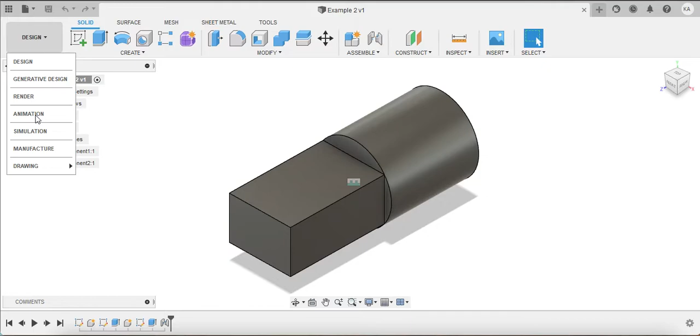So if I want to create an exploded view, this is going to be in a different workspace called animation. Go ahead and change that big button to say animation. And here there is a timeline. So we want to transform this by moving some things around.

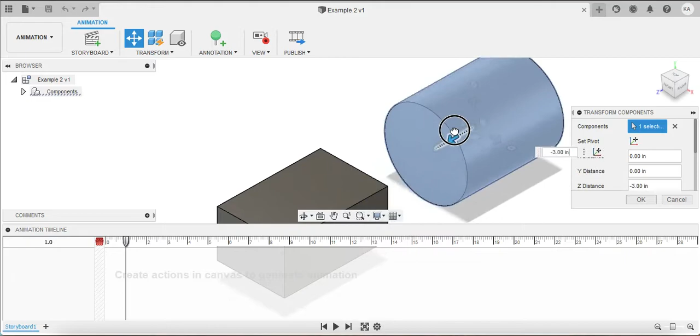We could try the auto explode, but I haven't had any good luck with that. So instead I'm just going to click on the arrows there, select one of my components, and use the arrows to separate these 2 things out. Press OK. You could certainly separate as many pieces as you need, and here you can see the separation that's happened.

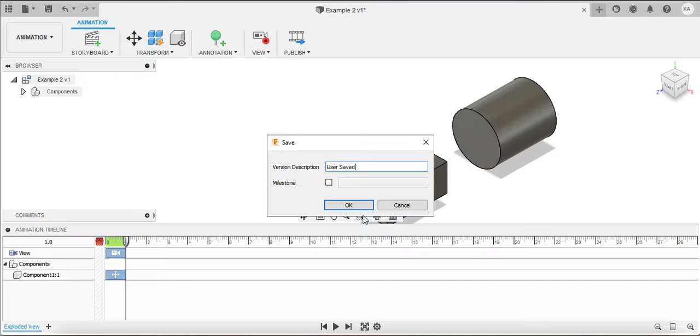Down in the lower left, this is called Storyboard 1. I'm going to right-click on that and rename this to say Exploded View. That way when I go to look for this specific item in my drawing file, I will be able to find it. So I'm going to go ahead and hit Save, click OK. It is saved as part of this design file. It is still in this design workspace, just in an animation space. And there it is, the exploded view.

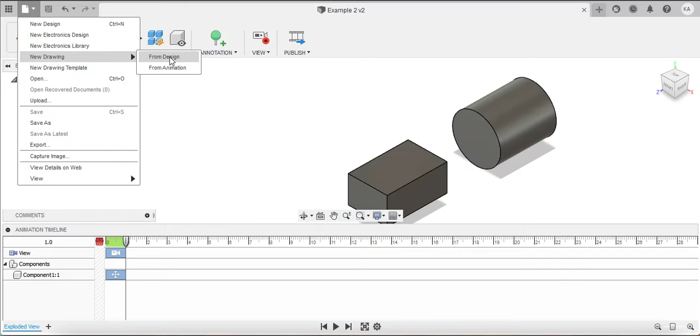So if we want to take our design and create a drawing, I'm going to click New Drawing from Design. That is definitely what I want, the full assembly contents. But I do want to change this sheet size to say 11 by 8.5. Go ahead and click OK.

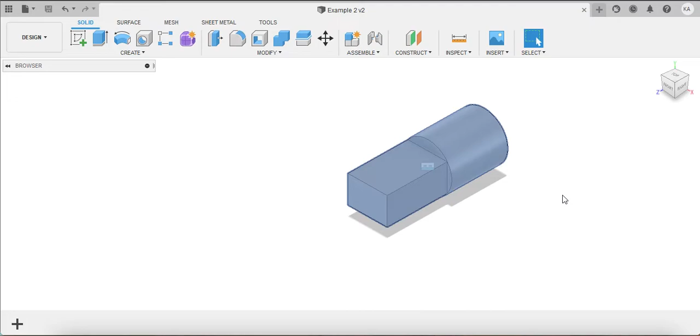And it takes a little bit to generate. It is still thinking. Yep, it takes a little bit of time, and that's okay. So by having selected the shape that I did, it is long ways. That's what I want to see.

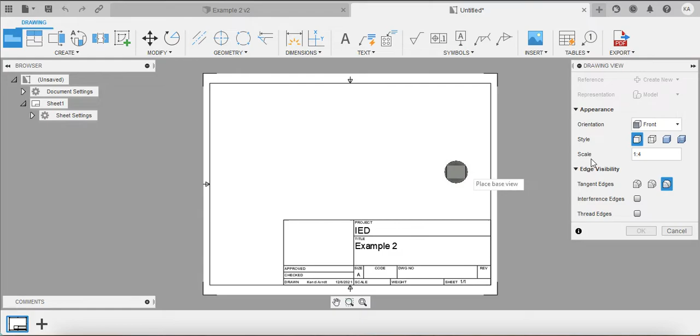And now right before I place the base view, I can change the appearance, I can change the orientation. So maybe this is what I would prefer my base view to look like. Go ahead and place that and click OK.

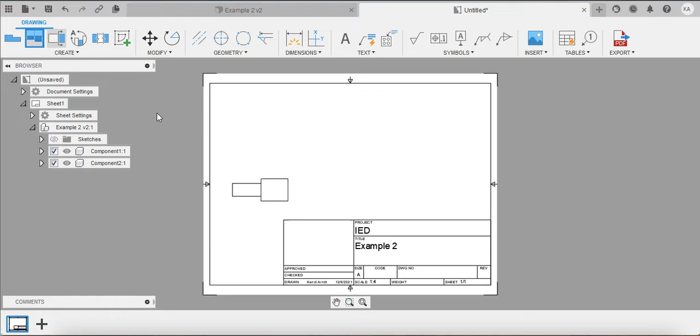And then if you want to have any projected views, which of course we do, let's go ahead and choose projected view. Click on that, drag it to the right or drag it up, whichever direction would be best. And be sure, of course, to have an isometric as well. Press enter when you're done doing that.

Definitely double click on the isometric and change the appearance style to shaded. That is definitely what we want.

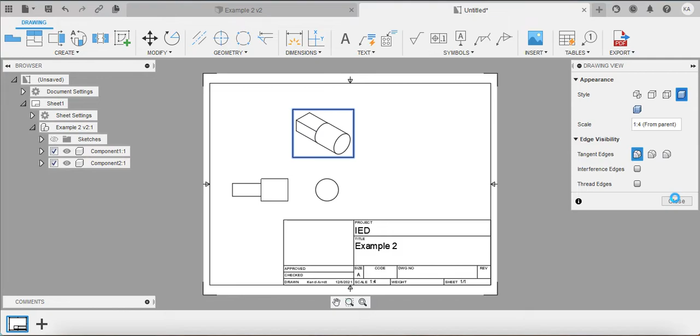And of course, as always, put in a couple of dimensions to indicate how these 2 things are related to each other, how far some things are away from each other. You don't need to put any individual part dimensions, don't worry about that. The last item we want to bring in is the exploded view.

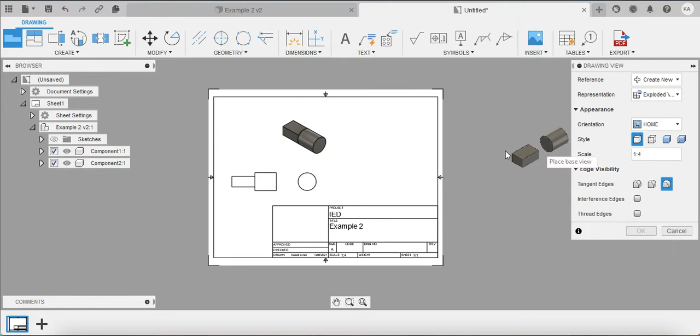So when we go up to place base view, this time instead of representation of model, we're going to select exploded view. That's coming in from our storyboard. And that scale is a little too big, so maybe change it to 1:4, and then we can see the exploded view there. Go ahead and click OK.

Leave that unshaded, that's perfectly fine. Unlike Onshape, there are no lines that connect this to show how the 2 are connected, but that's why it's on here with the isometric and the rest of the representations, so that we can see that.

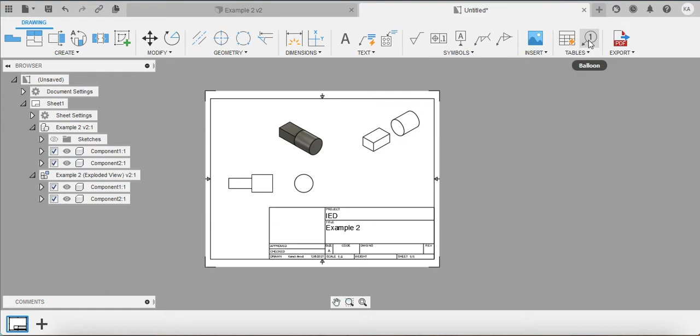Additionally, we want to include things like our balloons. So go ahead and select balloon. Make sure you drag those off at an angle, putting a balloon up for each individual item. And then go ahead and click table, and under type, click parts list.

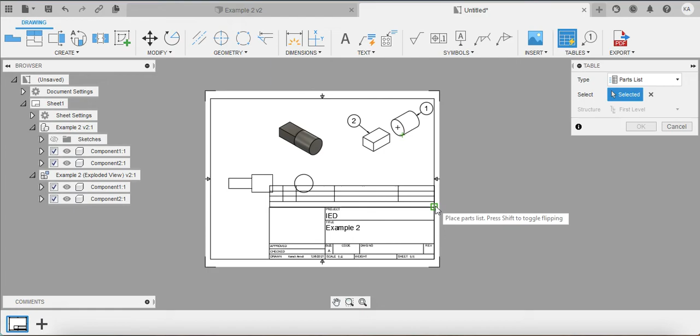Select any one of these objects. I'm going to select my exploded view. And then we're going to place this. We might have to do some movement here shortly. And sure enough, there are my component 1 and component 2. I probably should have named them.

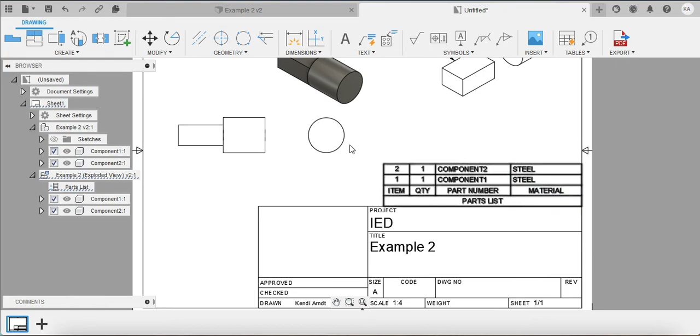Yep, definitely should have. Apparently these are made of steel, I didn't know that. Hopefully you've changed your material to be correct. And if we don't want description, double click on your chart and you can take description out, and that way it helps fix up some of these issues with what we're seeing there. So we've got item, quantity, the part name or in this case number, and the material. That is an example of how to work with a drawing file as well as the exploded view.